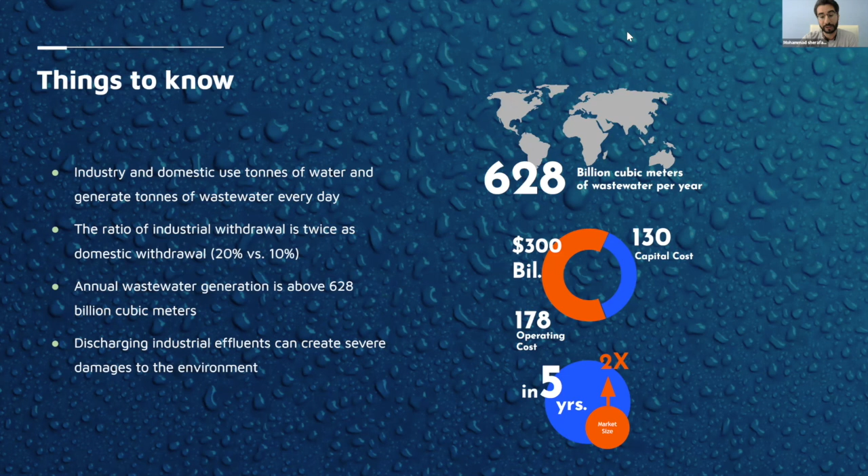So, the areas of focus for Hydroleap. As I said, our technology is applicable to quite a variety of wastewater, but at this point we are focused on construction wastewater, managing to treat silty water before disposal to the drainage. It's quite a big issue in Singapore.

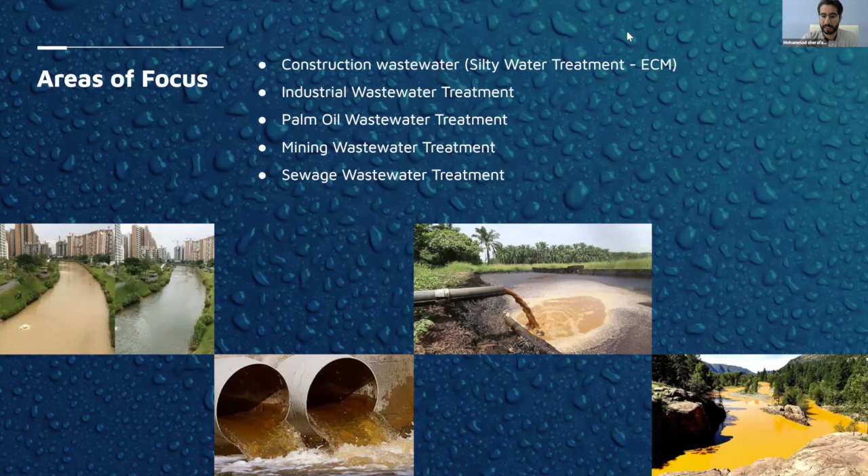They have 24 hours, 7 days monitoring for it. We have been partnering with a lot of industrial wastewater treatment companies, as well as palm oil, mining, and sewage wastewater treatment. So what is basically done for all of this industrial wastewater currently, how do they do it?

There is a conventional solution for the treatment of this wastewater that you can almost see in every single water and wastewater treatment plant, and it's called chemical treatment, or chemical coagulation flocculation. How do they do it? They just use two types of chemicals. They add it to the wastewater, mix it, and start settling it, coagulating and settling down those contaminants.

Even though it looks like we are making it cleaner, it's quite an irony because we are fighting chemicals with chemicals. We are treating it, but not actually treating it, because we are creating secondary pollution. The problems with this method are, first of all, it's expensive. The amount of chemicals used is so much that it becomes expensive, it's not environmentally friendly, and it's pretty much manual. What I mean by manual is there's a lot of dosing pumps and all of that, but getting the optimum amount of chemicals you need to dose into the system is almost impossible.

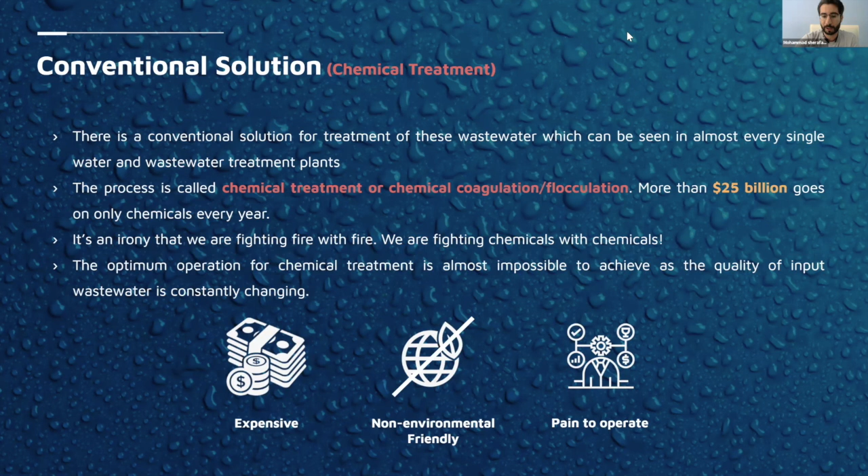So let me show you a typical wastewater treatment, a chemical wastewater treatment, and how it looks like. This is a construction site in Singapore. You will see such machines in every single construction site in Singapore.

As you can see, there are big machines and a lot of chemical storage and chemicals that they use on a daily basis. The problem is they use a high amount of chemicals, need chemical delivery and storage, and have high maintenance. During the raining season, every 8 or 9 hours they need to stop the system to clean it and get rid of contaminants, and it occupies a larger space.

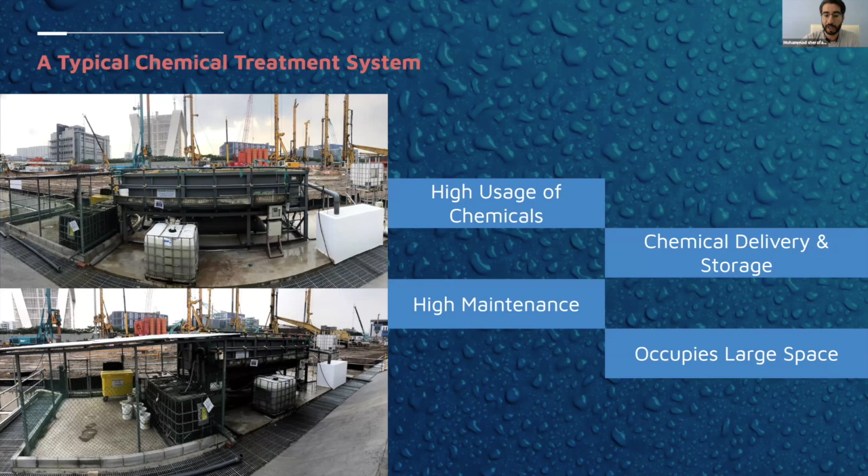If I'm going to show you exactly for the same capacity what Hydroleap has been doing, we are basically providing a chemical-free, cost-effective, and environmentally friendly solution for this kind of wastewater. The core technology for us is electrical and membrane technology.

What kind of value proposition are we adding? First of all, it's a packaged and modular solution, which makes it easier for installation and for moving it from one place to another. The footprint we are saving is 2 times, and it's cost effective somewhere between 2 to 3 times.

On top of everything, we are adding automation. Basically, you don't need to have an operator on the system. The only thing you need is to supervise the system, because it can adjust itself for treating and backwashing. So these are some of the wastewater treatments that we have already done.

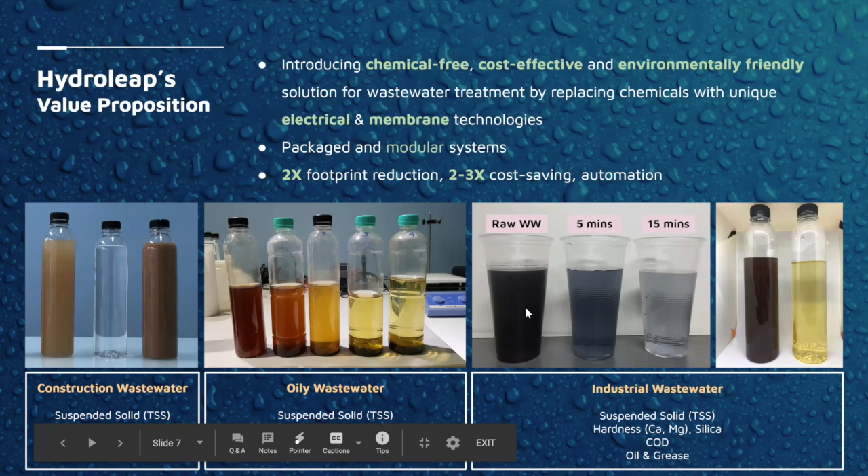As you can see, it doesn't matter what kind of quality of construction wastewater goes in, you can get really good quality water coming out. For oily wastewater, we are dealing with polymer companies, companies like PMG, and industrial wastewater like tannery wastewater, one of the hardest wastewaters to treat. This is only using electrical treatment, shown after 5 minutes and after 15 minutes.

So, sorry, could you wrap up? Yeah, oh yeah, sure, absolutely.

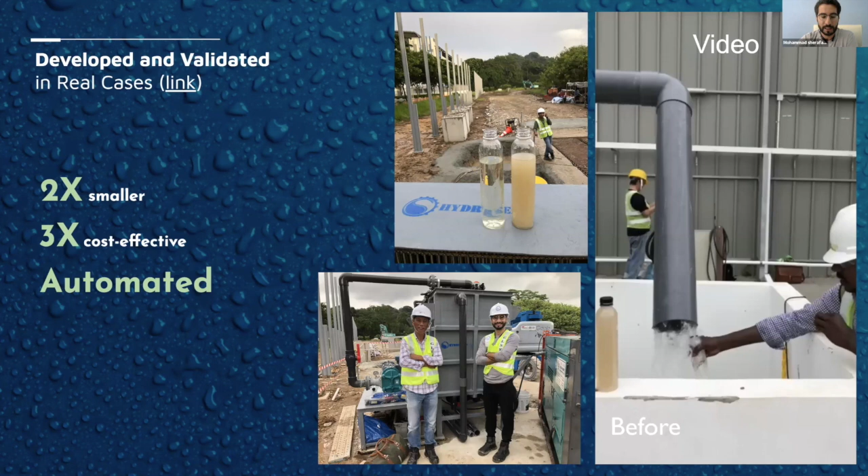It's almost there. So basically, as I said, what we are offering is a solution which is 2 times smaller, 3 times more cost-effective, and automated. The system you saw a few slides before, the chemical treatment, the middle one is doing almost the same capacity in half of the footprint and using no chemicals.

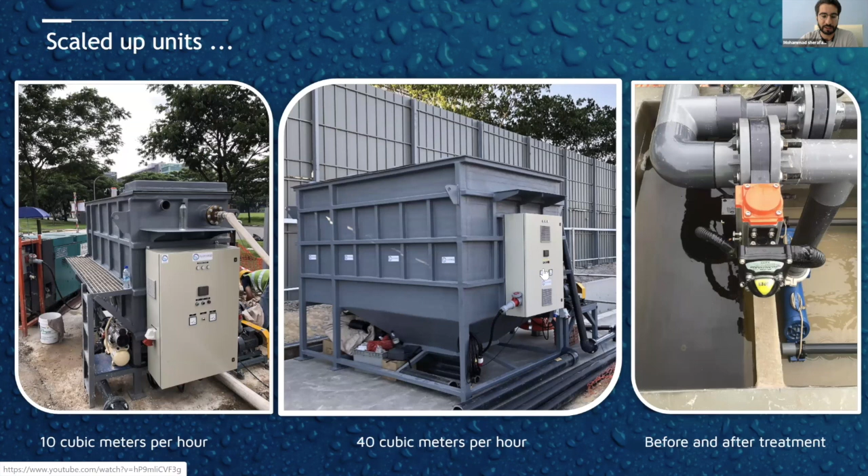The new development we recently had, instead of even making it into tanks, we're making it into a modular system. From one module to more modules, we can just add on, making it much easier to scale up and easier to automate. We have also added cloud monitoring, so the operator from home can operate what's going on in the system.

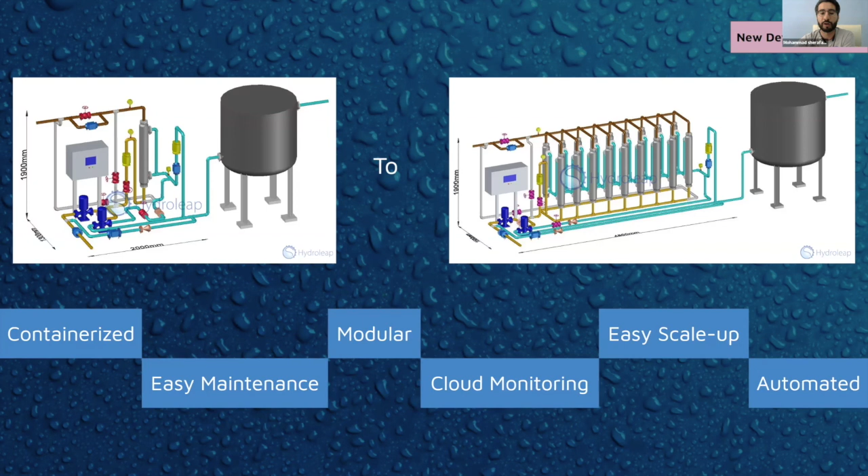This system is going to be in a container, so it's easy to ship. That's because one of our goals is to go global, not only serving the Singapore market, but also the global, international market.

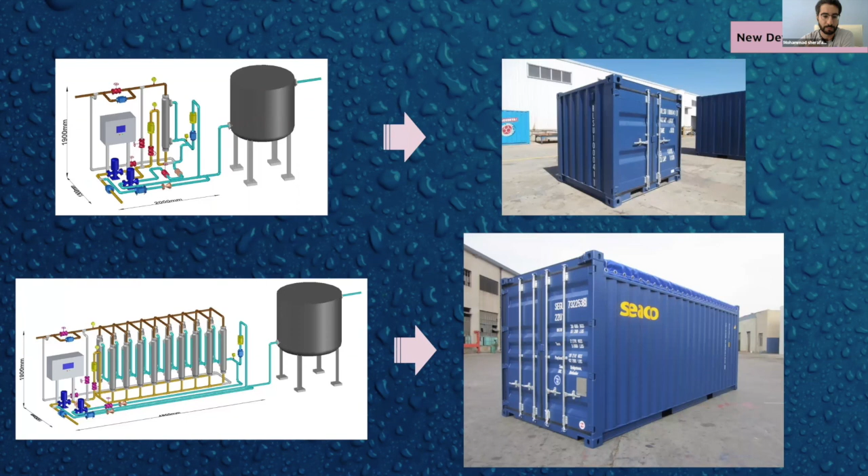Our business model does both lease and sales. For example, for the construction industry, we manufacture the system and lease it to clients. For some industry partners, we manufacture it and sell it to them. So we are quite flexible on that side.